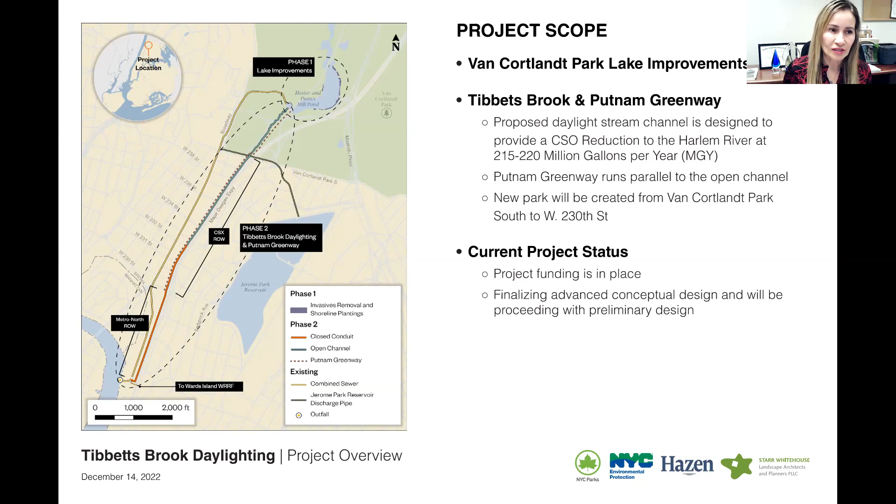Just to recap, the project funding is currently fully funded. As I mentioned, we're coming back to you to get more feedback before taking it to later design stages for the PDC meeting next summer.

These are the four areas we're going to focus on today, and we believe these are the four areas you've given us significant feedback on at this stage of the design.

Connectivity and circulation - Gail and the team will talk about that and the resulting analysis. Maintenance and access has been a key component of the project formulation. The good news is we've done a lot of meetings with our operational folks, as well as the fire department and NYPD, to get their feedback.

So what you're going to see today incorporates not just the consultant team, Parks, and DEP, but also input from those other agencies. Then we're going to talk about the stream access points for the public and the community, and end with the public art question.

We've been asked, it's great that you are doing this wonderful water project, a greenway, but where's the public art? That is really going to become alive as part of this project, which we are going to touch base and close with.

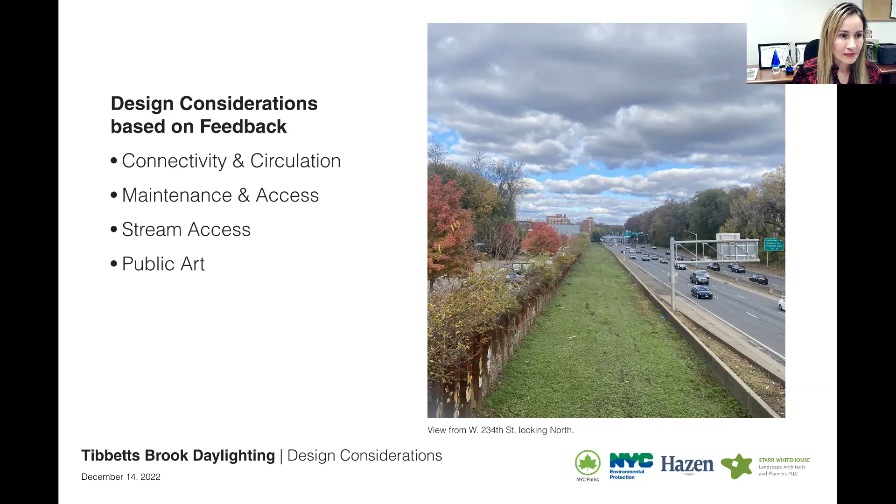So with that being said, I think the next one is Gail is going to pick it up and start talking about the context and connectivity. Gail, floor is yours. Thank you, Pinar.

So we're Stark Whitehouse Landscape Architects and Planners, and we're really excited today. Me personally, because I see some familiar faces in the crowd, and I had worked on this with you back in 1997, and in those days we thought it was a great idea, but it was kind of a pipe dream, and the plans got put on the shelves and in a few people's pockets. It's so exciting to be here to present these plans with the urgency on behalf of DEP to get the project done and in construction by 2025. So I'm just incredibly excited and honored to work on it.

As Pinar mentioned, we picked up where the TAG meeting left off last time, working with the hydrological work that Hazen had presented and early concepts. We started first really looking at connectivity to the neighborhoods, to Van Cortlandt Park, and looked at those access points, zooming out and how they connected to the bicycle network, how maintenance and access could get into the corridor, how the park circulation worked in relation to those access points. So we zoomed way out, and that's where we'll begin today, and then we'll start to dive into more details in the next phase.

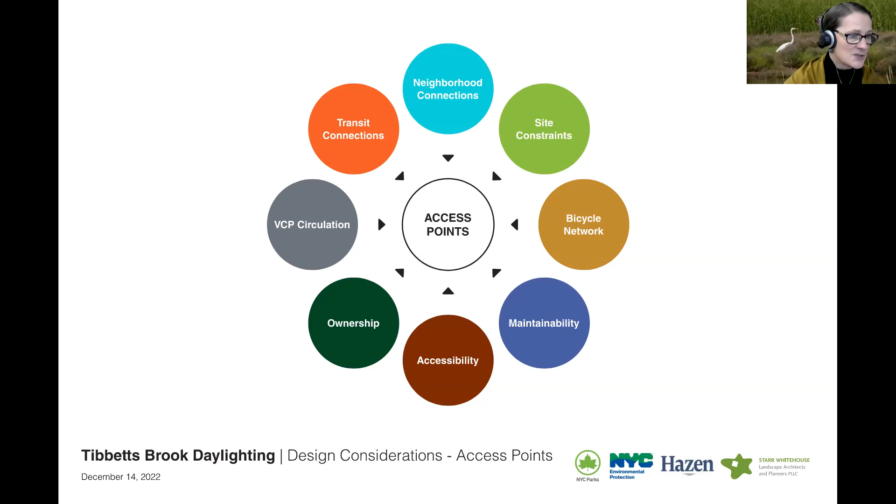One of the most important things, looking at it in a regional scale, is to understand how important this link is in the Putnam Greenway, the recently connected section in Van Cortlandt Park. It was actually recently co-opted by the state and is part of the Empire State Trail. So in theory, you can start your trip to Canada from Tibbetts Brook. So it's really a greenway of statewide significance, and I think that's very important. It also connects south to the growing network on both sides of the Harlem River. So it's very important, and will continue to be a destination in and of itself.

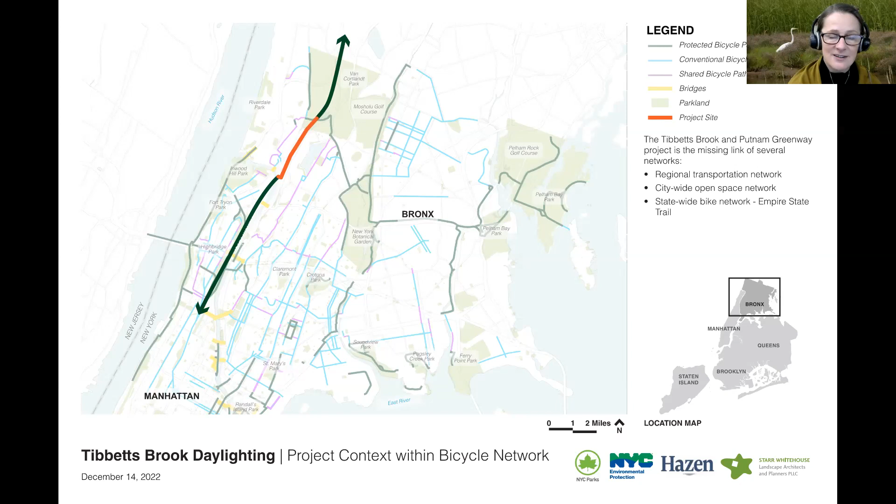So I'm just here to set the stage for my talented colleague Ankita Gupta, and she will take you through the details of the advanced schematic design. So I'm passing it off to you, Ankita.

Thank you, Gail. So I'm going to be talking about where we left off, the access points from the last meeting, which was held in spring of 2022. So where we are now is all access points are universally accessible, and we've managed to have gradual slopes from the street level to the corridor. I'm going to talk about the access points as we are now.

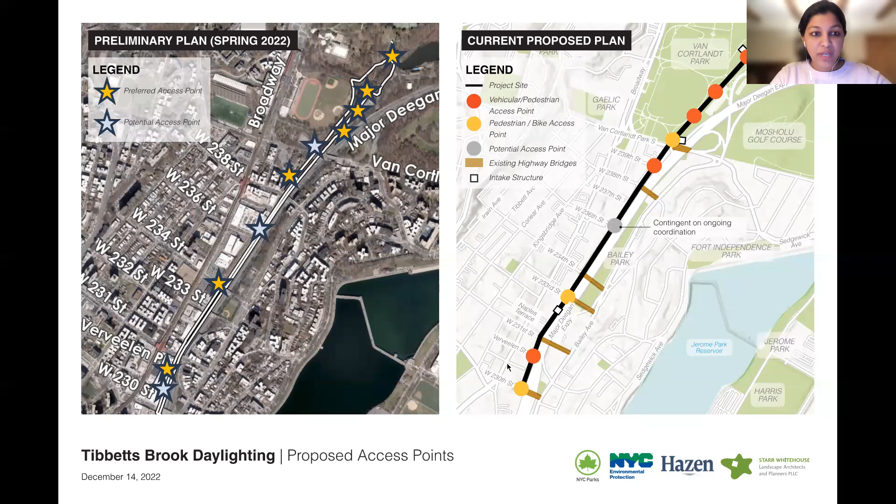Starting from Van Cortlandt Park, we did reduce one access point there, and we have 4 of them now. We have a confirmed Van Cortlandt Park South as an access point. Moving south, the West 236th Street is being considered, but it's contingent upon ongoing discussions with private property owners. We did look at 234th as an access point, but shifted it to 233rd Street due to constraints of the adjacent property being in private ownership, and to allow for a better orientation of the ramp towards the north. We also confirmed 230th Street as an access point.

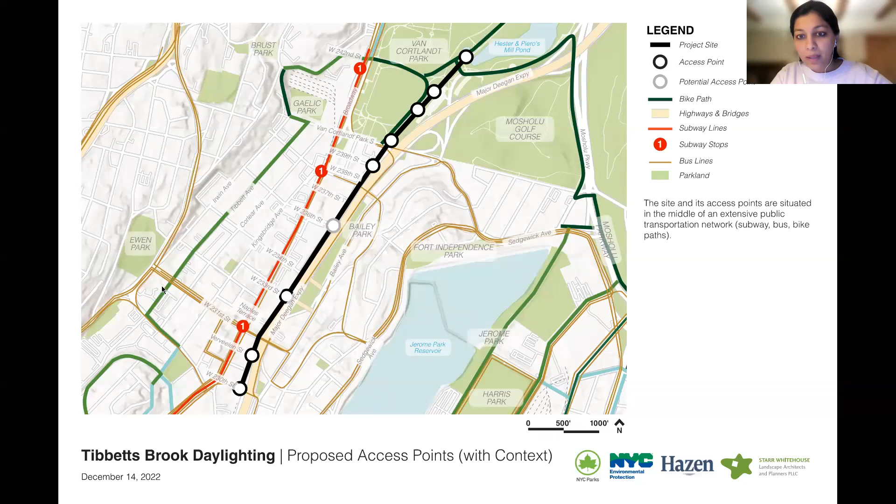Here we are showing all these access points in relationship to the analysis that was performed regarding the subway lines, the subway stops, bus lines, and bike paths.

Here we are looking at the vehicular access points for maintenance and emergency. These have been reviewed by DEP, Parks, NYPD, and FDNY. So we have 3 within Van Cortlandt Park and 2 in the CSX corridor.

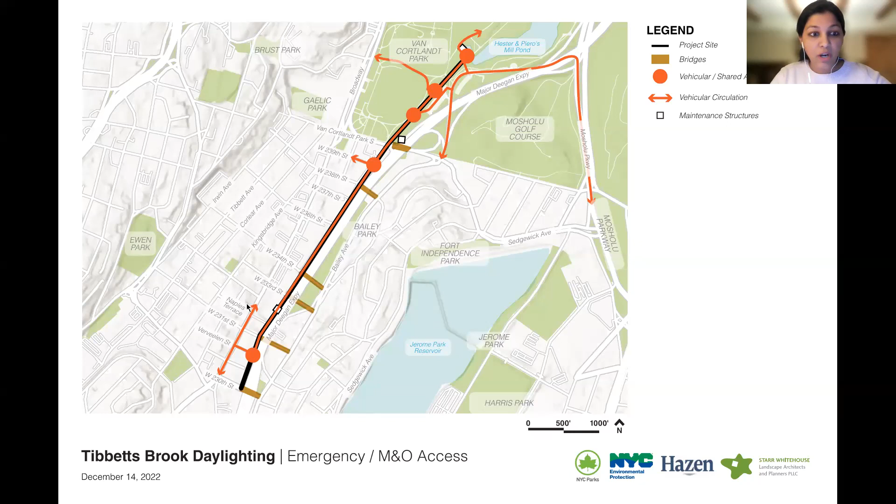Looking at the circulation within Van Cortlandt Park, this has been refined since spring. We've strengthened the east-west access by shifting the proposed bridge to better align with the existing park circulation, as well as with the strong desire line from the 242nd Street metro station into the park. And the existing parking area now serves as a trailhead with 2 access points that open onto the parking lot.

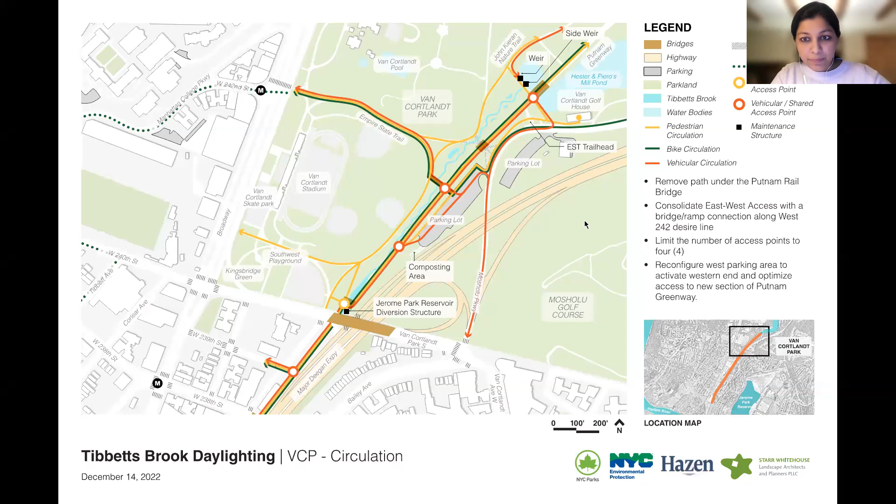So diving into the design, next please.

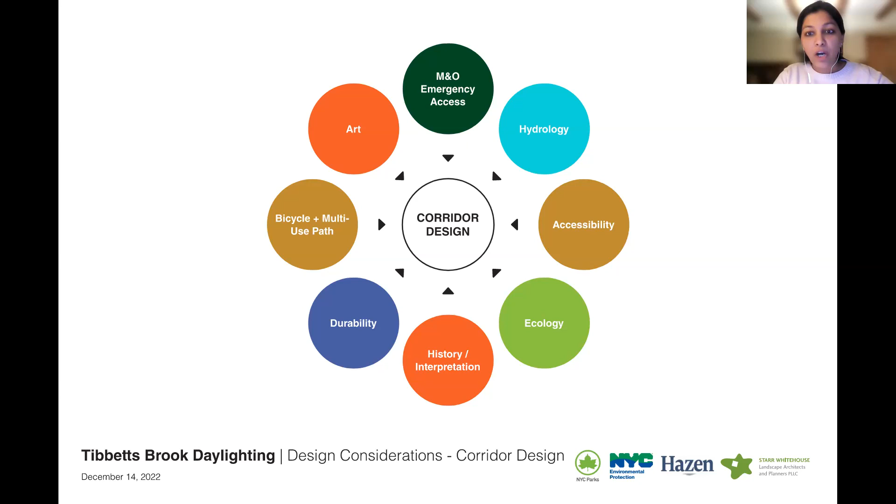In terms of design considerations, there was an ask for a more dynamic design within the corridor, and so in response, we revisited the design, and some of the things we looked at was accessibility across the park, ecology, and bike paths.

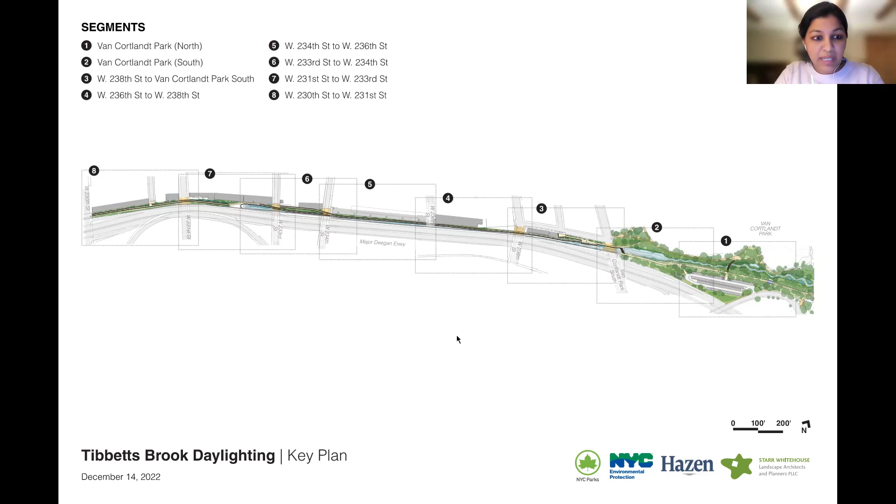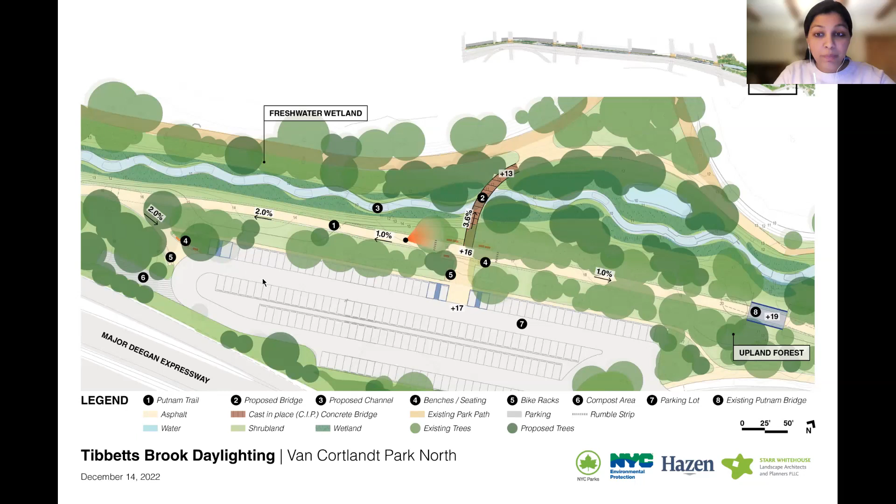As I mentioned earlier, we've shifted the location of the proposed bridge to tie in better with the east-west park circulation, as well as the West 242nd Street park entrance. We've also simplified access from the parking lot to the greenway, so now we have two trailheads that accommodate bike racks, benches, and trash receptacles, with two entrances leading you to the Putnam Trail.

Here it's a section under the existing blue Putnam Bridge. The bridge currently is a low spot and is prone to flooding after rain events. Previously we had shown a pocket wetland extending under the bridge, but now we are regrading and modifying the topography to create a dry side to the west of the bridge and a wet side to the east, ultimately capturing this water into the new daylighted channel.

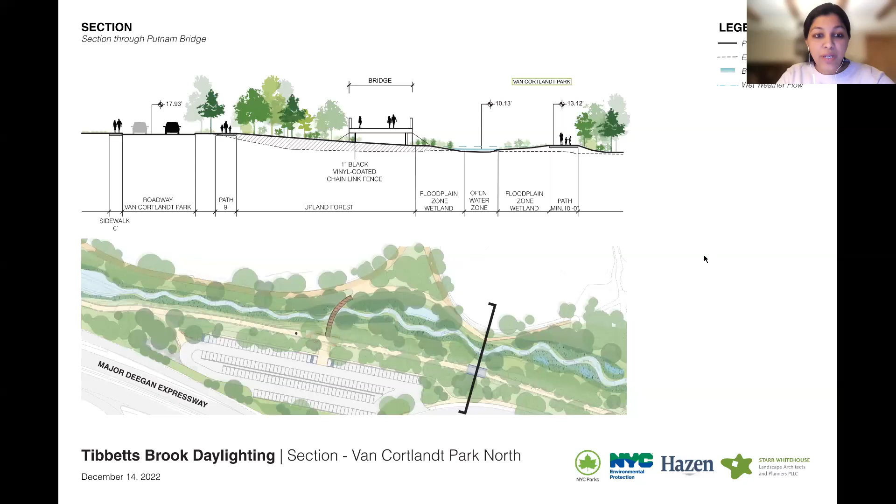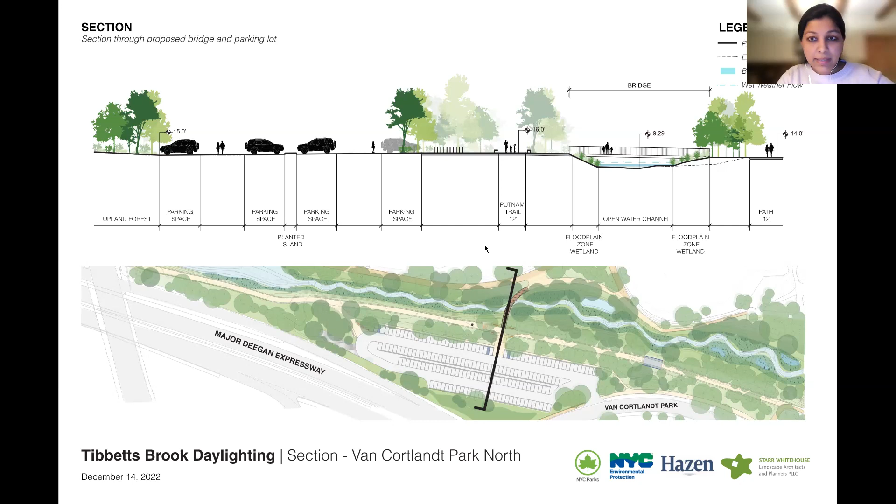This is showing the new proposed bridge spanning over the daylighted stream, making a connection to the Putnam Trail and then into the parking lot via the trailhead. Here's a view looking north towards Putnam Trail. The existing parking lot is to the east, and the proposed bridge is to the west. We were able to get a seamless connection here as the topography is fairly flat.

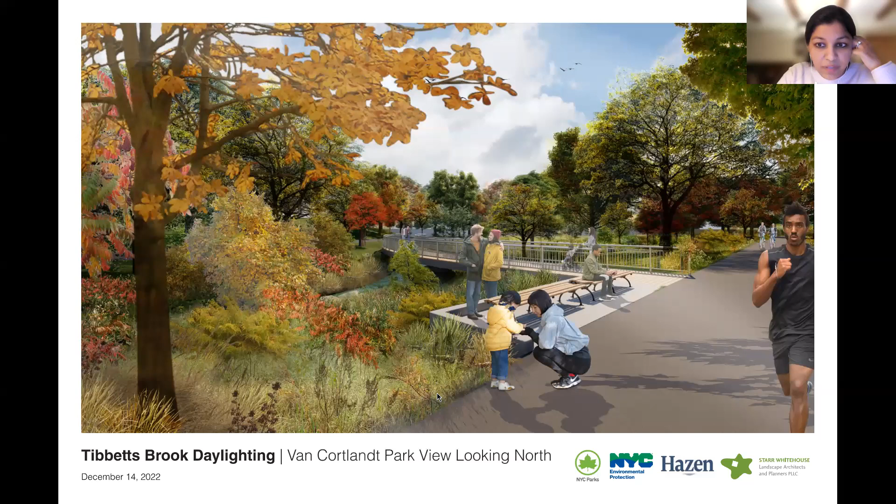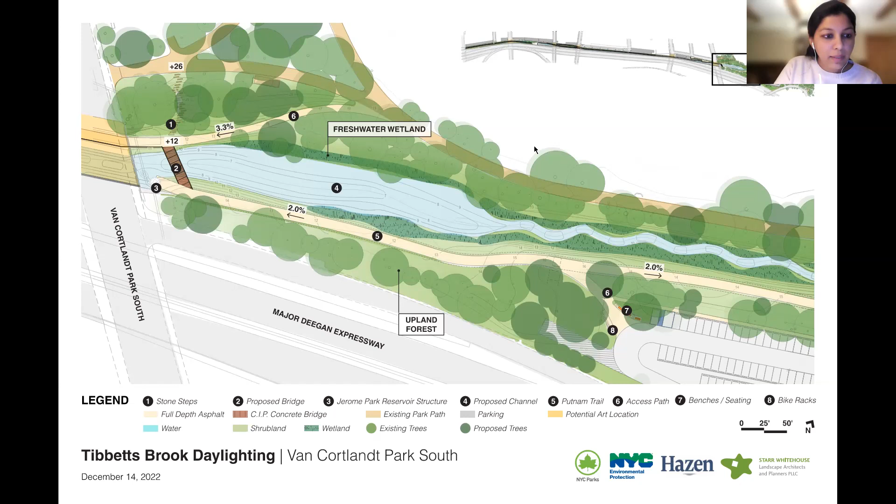This shows the relationship of the Putnam Trail to the proposed bridge and the stone steps to the east of the existing Van Cortlandt Park paths.

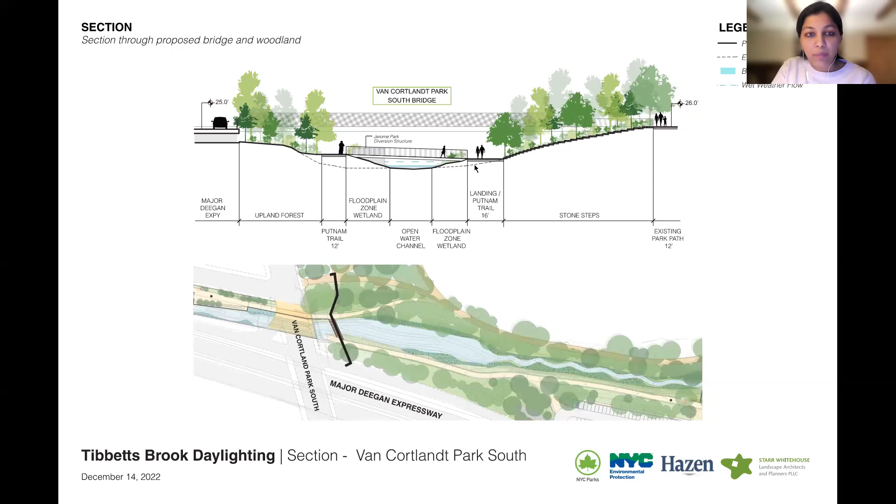Moving into the CSX corridor design, this is an image from Van Cortlandt Park South overpass looking towards the 239th Street access point. This is also the widest part of the site.

Here we have a path that was previously cantilevered, and feedback told us the general alignment was too linear. So we refined the design, and now the proposed elevated concrete pathway has more flexibility with the alignment of the path and allows for more planting areas. The path is sufficiently elevated to avoid flooding during typical rain events.

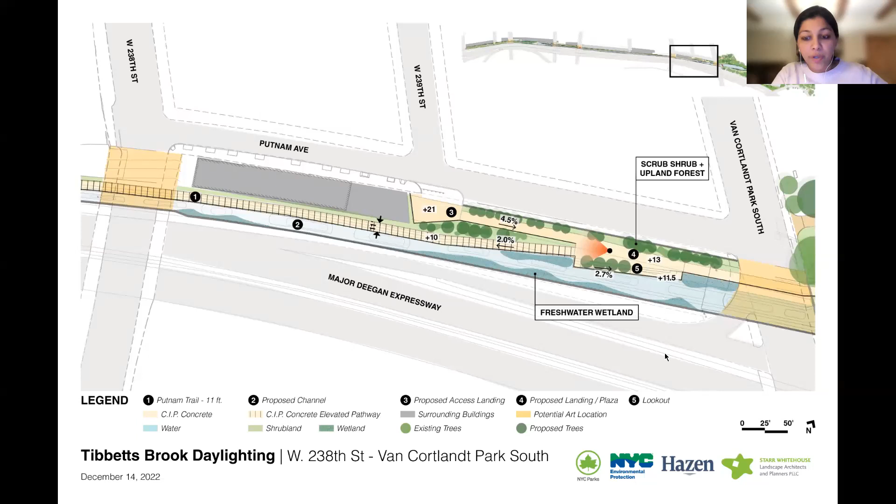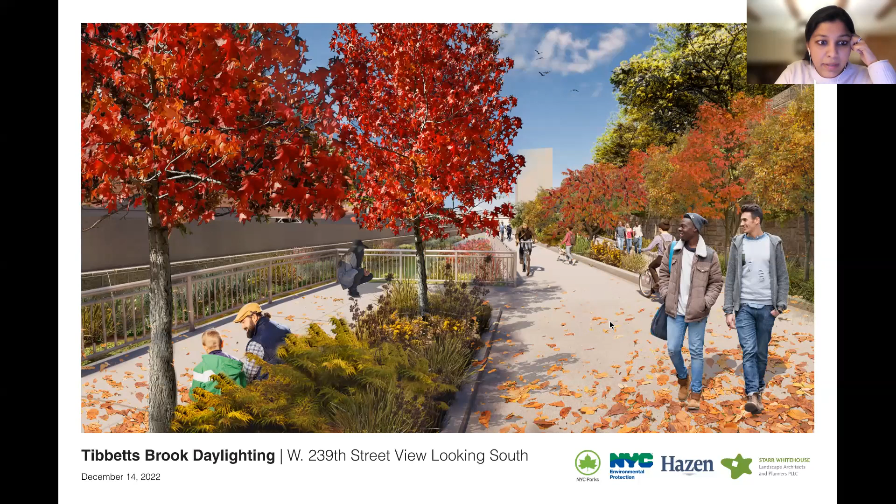Moving to the next section, between 238th Street and 236th Street, this is a fairly narrow section within the CSX corridor. We pulled the path away from the large BJ's building to create some planting buffers, and the elevated path gives us flexibility in terms of alignment. We overlapped it with the stream where possible to create a buffer from both the Major Deegan Expressway and the large building structure.

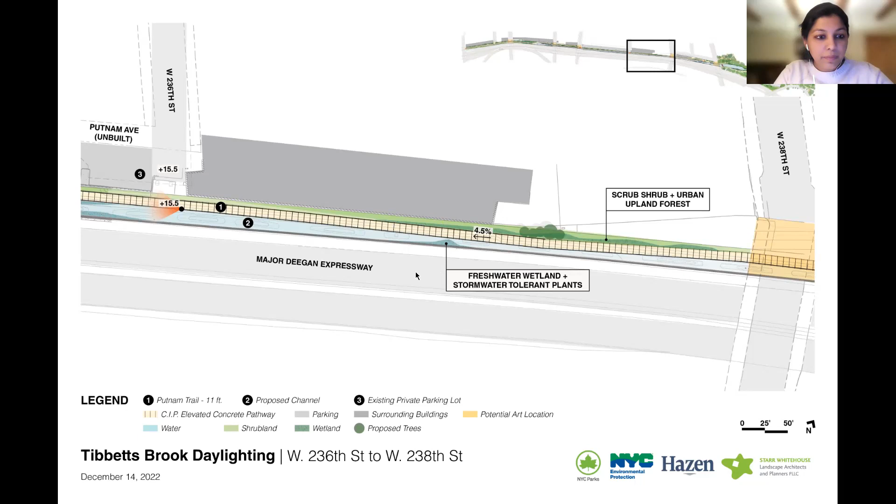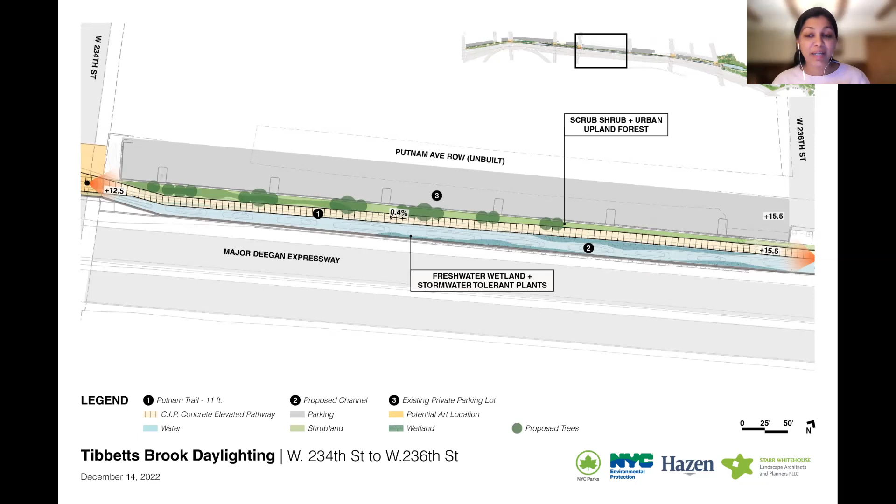Moving on between 236th and 234th, the path here is elevated at the same elevation as the adjacent private parking lot, allowing for future access if an easement can be obtained. We tried to meander the path as best we could to create variety, not just in plan, but vertically as well, as the path rises to meet the parking lot elevation and then comes back lower.

Here's a view looking south with Major Deegan to the left and the private parking lot to the right. We have also started looking at native hardy shrubs to be included within the design in conversation with the Natural Resources Group.

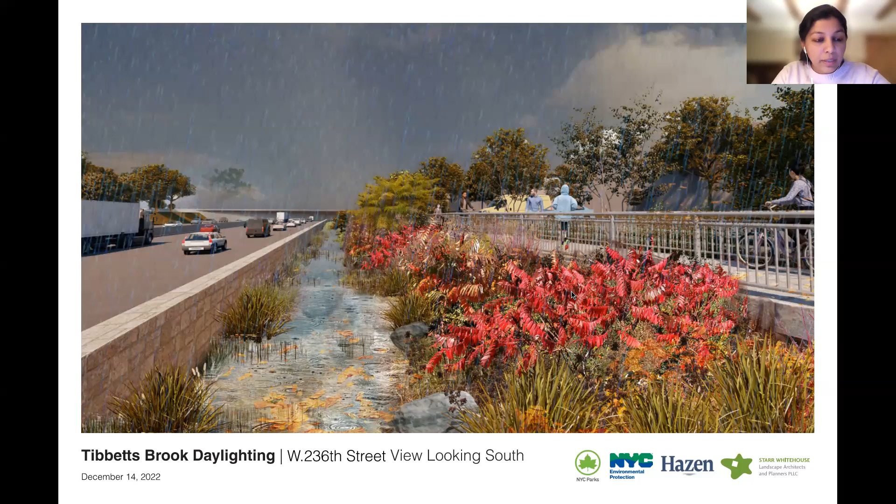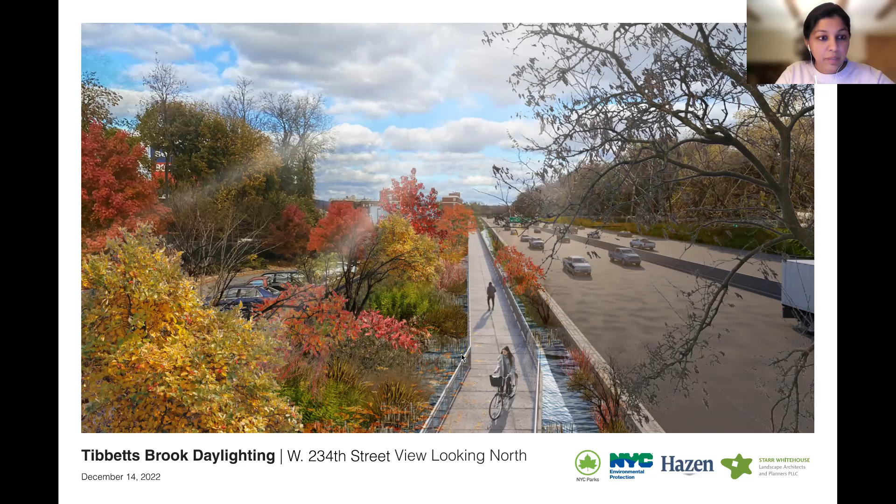Here's a view from the 234th Street overpass looking north. Again, the private parking lot is to the left, Major Deegan Expressway to the right, and then the path has a little angle to create for more variety across the corridor.

At 233rd Street, we did consider 234th versus 233rd Street. The entrance at 233rd Street did allow for a more direct connection to the greenway, and it minimizes the footprint of the ramp itself, allowing for more planted areas. It still maintains connectivity to Bailey Playground, which is to the east side of the Major Deegan.

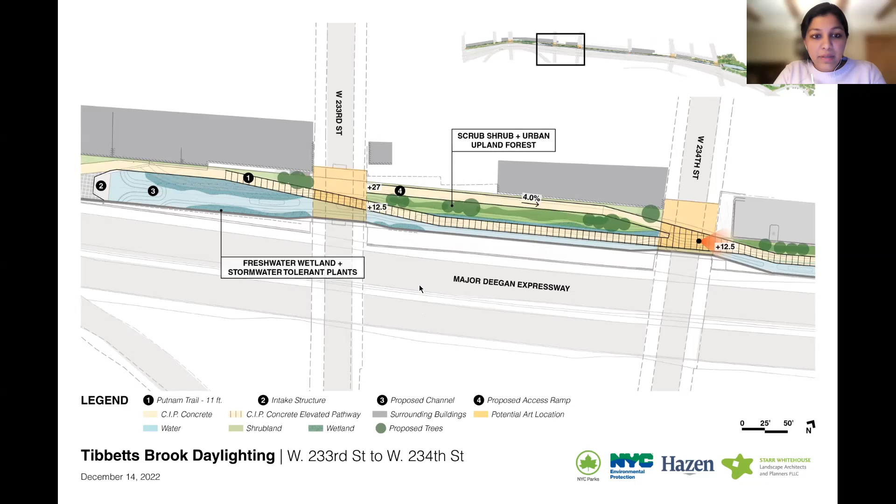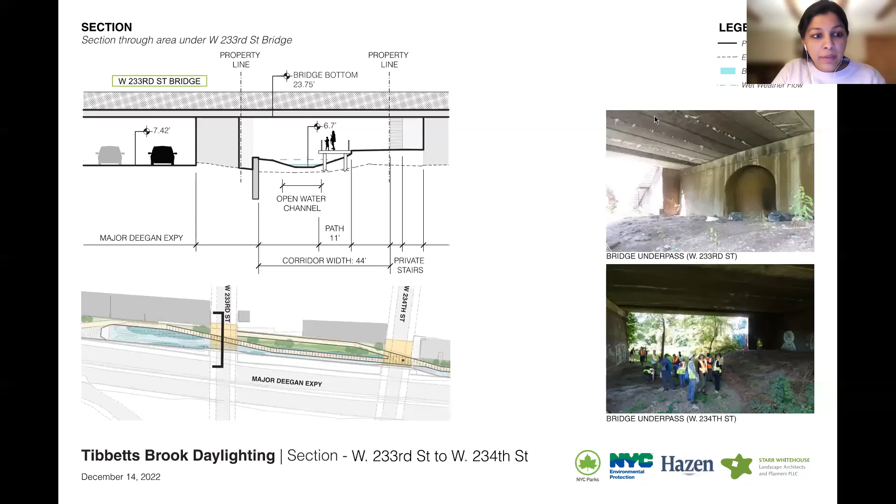This is the underpass, which offers a unique space for potential art installations.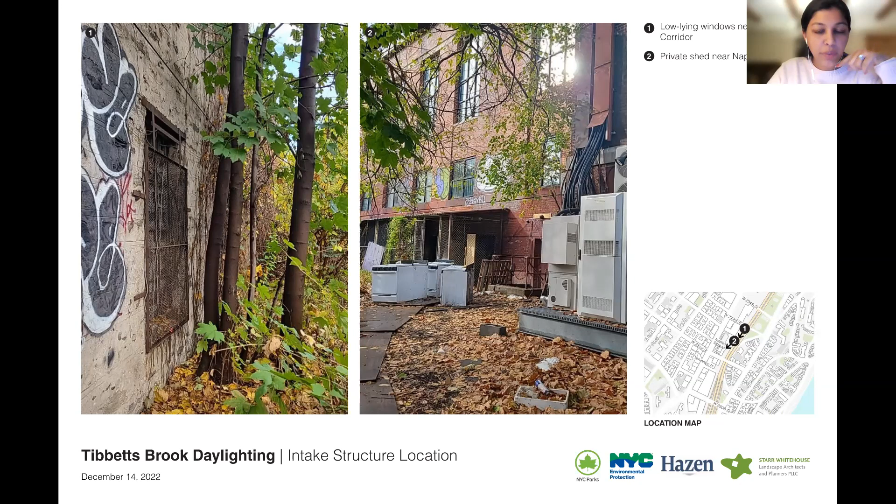As discussed in the last STAG meeting, there was a concern with these low-lying properties and how best the stormwater can be managed. So we have moved the location of the intake structure. Now it's between 233rd and 231st Street, highlighted as number 3, and shifting the intake structure has allowed for a more flexible grading adjacent to the properties, and we've included a bioretention area to capture the water from these sites.

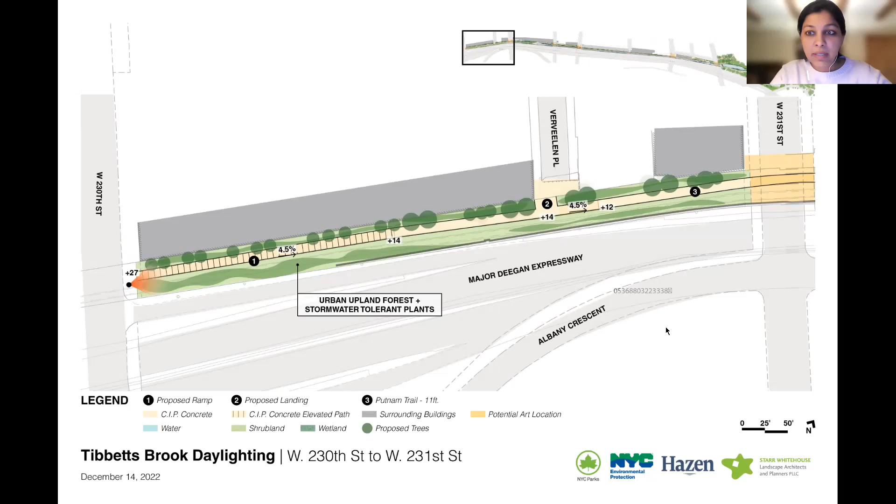We have now the new access point from 230th Street to provide for that east-west access, and then where Verveelen Place is included as a vehicular access point, which can be used for maintenance as well as for emergency purposes.

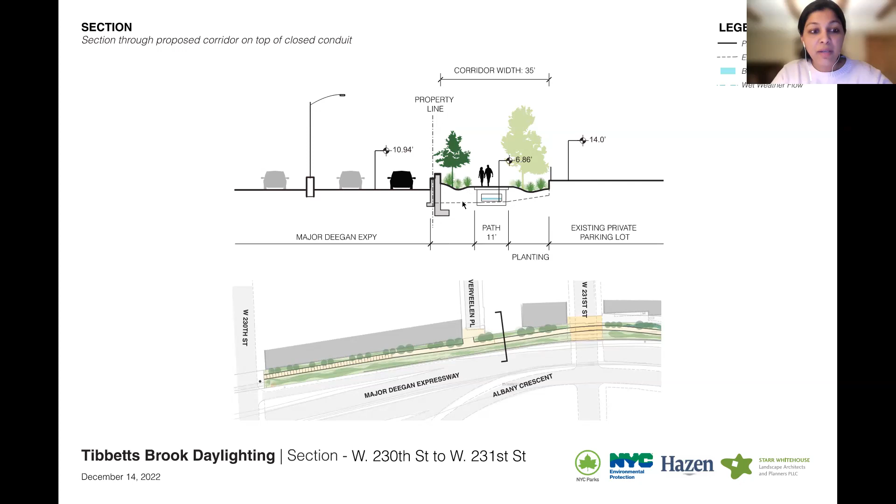Once the stream is in this underground buried pipe, we are trying to make the path and the pipe coincide. This will allow us to maximize planted buffers on either side of it.

Here we can see the buried pipe and the ramp from 230th Street adjacent to each other.

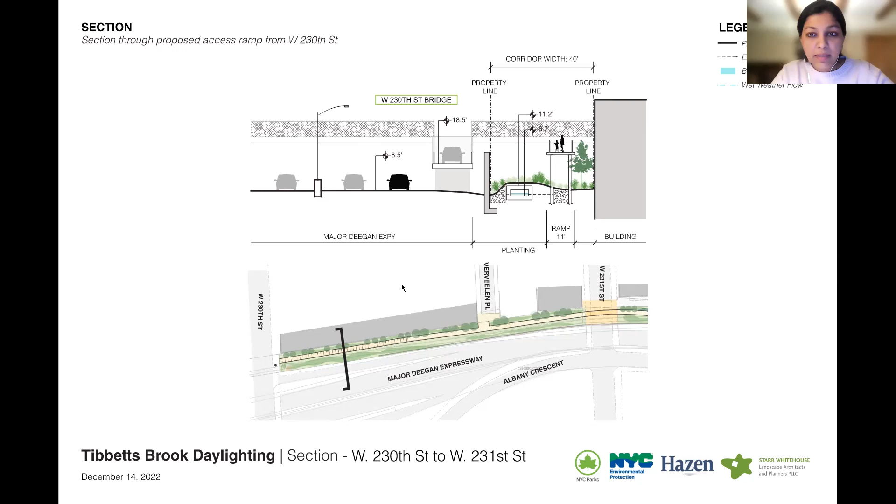This is a view from the 230th Street overpass looking north. So that's the big building structure to the left, a planted buffer, the ramp, and then Major Deegan Expressway to the right-hand side.

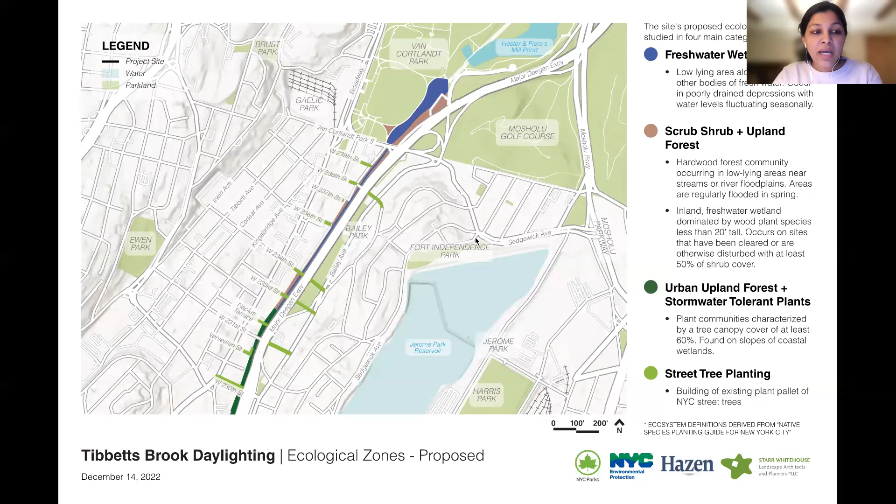Now we're going to briefly talk about ecological connections. The planting design, we've started to look at it a little bit. We want to do our best to embrace the microenvironments of both Van Cortlandt Park as well as the CSX corridor.

The palette will be such that it's extremely tough, which can tolerate periodic flooding, drought, as well as the ability to compete with invasives.

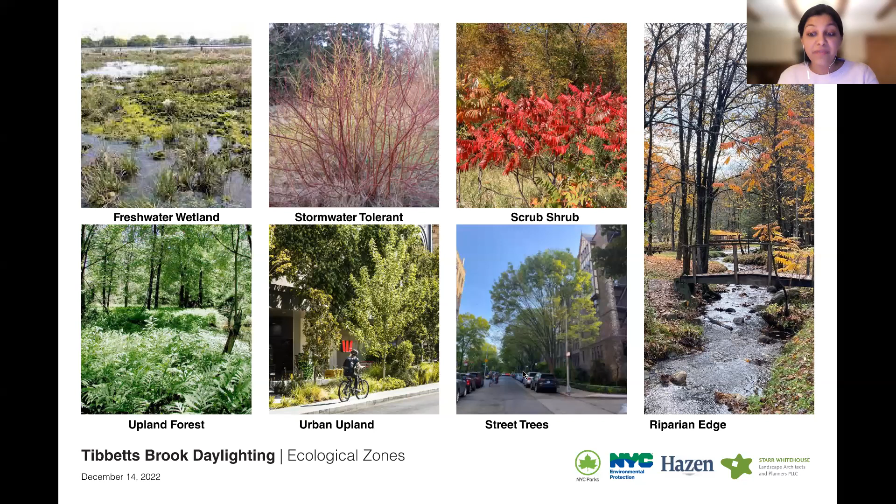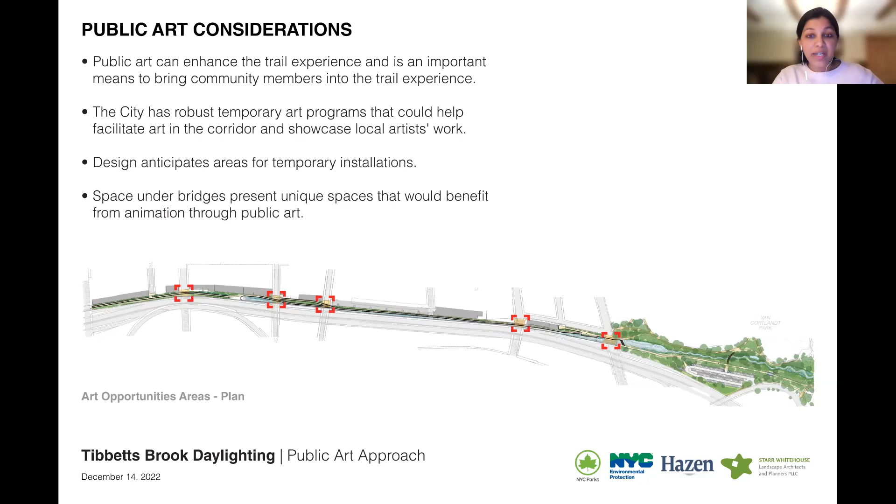And then art and interpretation. So we did evaluate spaces for art across the project. The space under the bridges presented to be unique spaces, and they can act as focal points across the site. These can be spaces to showcase work from local artists.

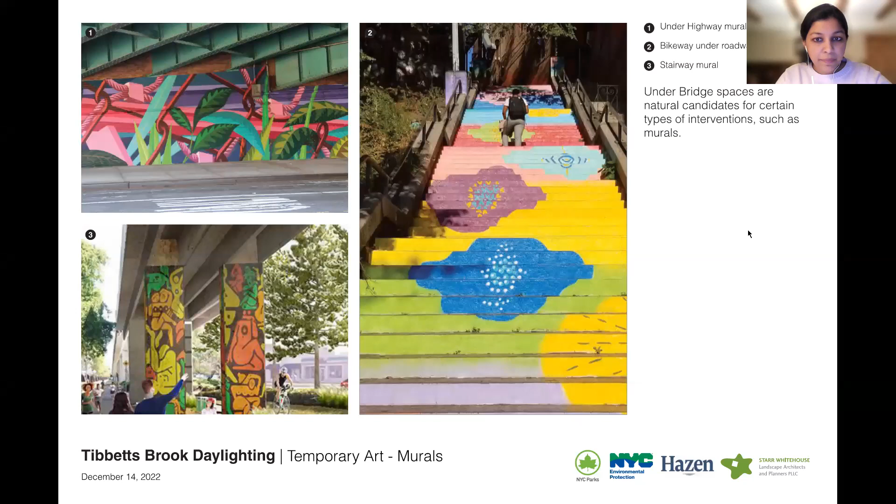So looking at temporary art murals under these underpasses. And then here there are opportunities to integrate temporary art into open spaces both on and adjacent to the greenway.

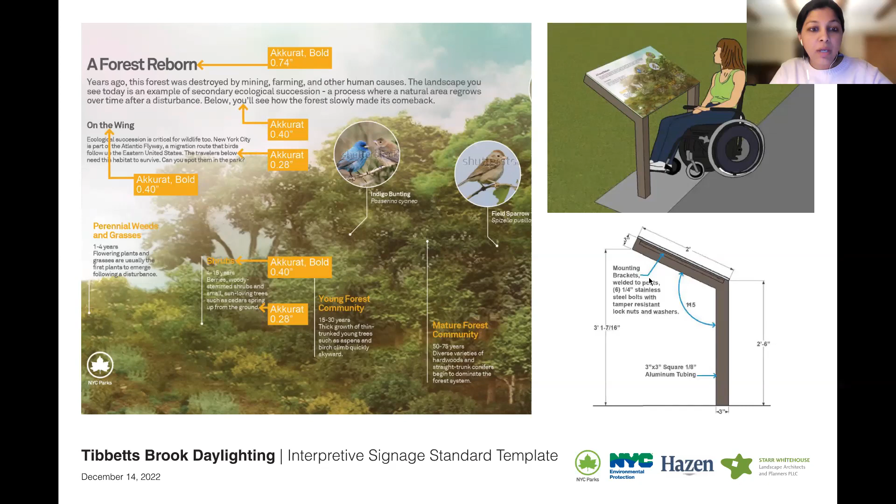We will be incorporating signage across the park. Here we're showing an example of a standard interpretive sign, which is approved by the Public Design Commission to be used across the site. And with that, I'm going to hand it over to Pinar.

All right. The next couple of minutes, I think we are going to go over a few questions that we've been hearing from you. Terry, you want to run these real quickly and then we'll talk about the next steps?

Sure. So these were kind of like the top 3 questions we've been working on. I think as we move forward, we can build upon this as we start checking things off our list, and we can put that up on the Tibbetts website as well.

So regarding the potential access point between 234th and 236th, we have been in contact with the property owner about potential access easement. The greenway is being designed so that if there is access in the future, that it can be accommodated. So we've been in discussion about that.

Has there been any follow-up with the private property owner who reached out to the community board about selling their property? We are still considering this proposal. The property is not directly adjacent to the CSX corridor, so whether or not we acquire that property, it wouldn't impact the design of the daylighting project.

Another big question that came up throughout the process this year was about public art. Something we had to consider immediately was whether DEP could include funding for that in our existing contract, and what we could do in terms of any permanent art. The answer, after multiple discussions with our procurement and contracting people, is that we were not able to make that happen on our end in terms of funding for permanent art.

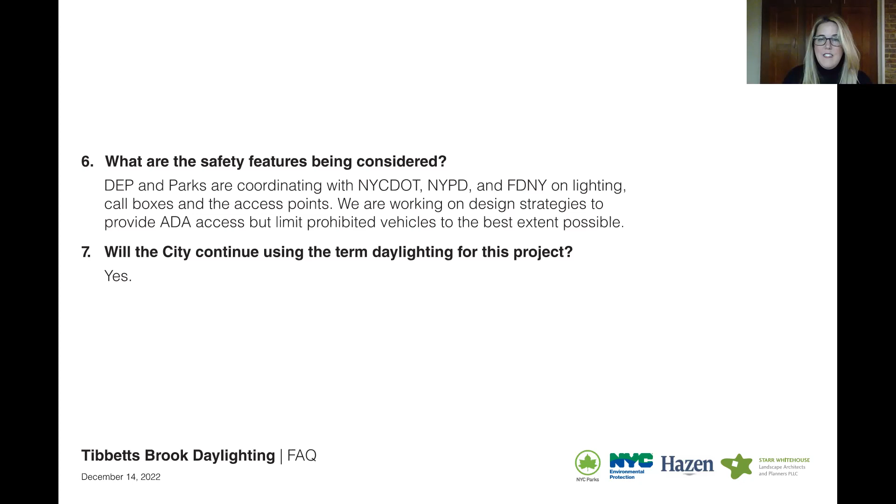So I think what we're going to do in the spring is repeat what we did this spring. We'll have maybe a field trip, another TAG meeting, go back to the community board, go back to the PDC. It's going to repeat as we progress with the design.

I also want to mention Ankita had shown a rendering of the potential interpretive signage. That's something we want your input on as well, and we'll probably be reaching out to discuss themes for that. We're not really far along in that process, and we'd love your feedback. At some point between now and the next TAG meeting, we might reach out and schedule something to get your input.

Did I miss anything, Pinar? No, I just want to add that we heard you loud and clear. We want to make sure we're on the right track to proceed and advance the design to the preliminary design phase, that's critical feedback to get. Is it a thumbs up? Are we doing good? Is it a go?

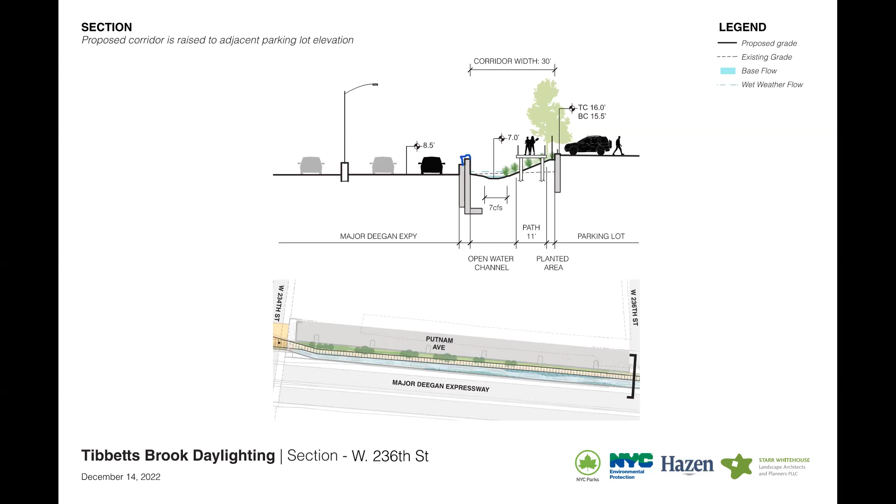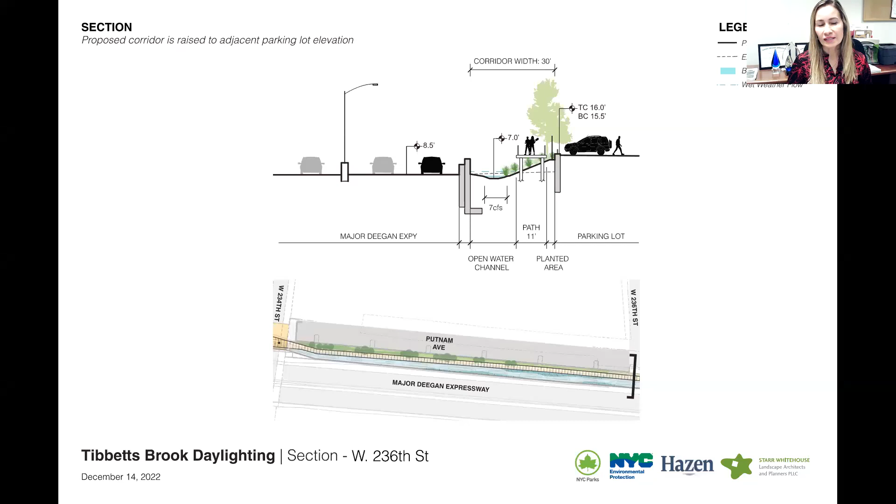Something I want to add - I think Charles brought up, are we saying the daily flow still goes to the combined sewer? The base flow, which is the 7 CFS, is going to go to this channel. We are talking about extreme flows that go above and beyond the 38 CFS, which the channel is designed for during wet weather conditions. So I just want to make sure that's clear. The answer is, on a daily basis when it's not raining, that is no longer going to the Broadway sewer. But when it rains, we have capacity in the stream to take it to 38 CFS above and beyond the baseline flow.

Okay, the next question is, what about restrooms and drinking fountains?

Did you want to take this one?

Sure. So regarding restrooms, we're talking about a tight corridor here and we cannot fit a comfort station in with everything else we're doing. That's why, as Ankita pointed out in the design, we made sure that one of our mid-length access ramps throughout the corridor connects up to the street network at 233rd, which can bring you right across to Bailey Playground, where there's an existing comfort station, as well as the comfort stations in Van Cortlandt Park. As far as water fountains, I don't know if we've gotten into that kind of detail yet. Gail, can you weigh in? Not yet, but that's something we can still look at. Certainly in Van Cortlandt Park, where those are really important trailheads, you'd have your bike rack, your bottle filler, your bench. It's kind of a kit of parts that makes sense at those important access nodes.

Another question is about whether we're looking at potential gentrification along the new Greenway. The Highline offers us a lot of insight and information that we should consider. Yes, I think the city has considered that's a possibility. I think we always want to move forward building beautiful designs across all 5 boroughs and different types of neighborhoods. I think we're in a very different type of neighborhood than the High Line, in terms of what you're going to get with tourism, footprint, and traffic there. So it is something we've considered, and as we move forward, we can talk more about where we think that might be headed.

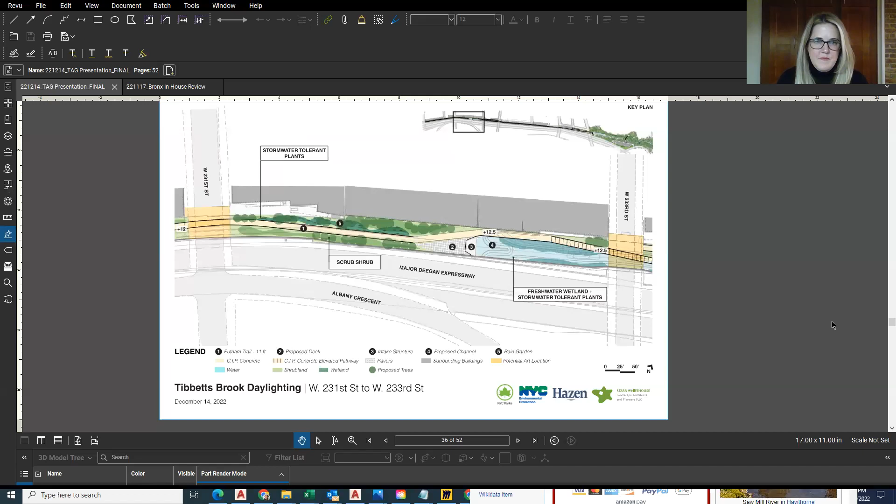You can clearly see the buildings, and from Broadway you can see them too. Can we point to that building with the parking lot? Yeah, right there - that's the building. So it's just north of that.

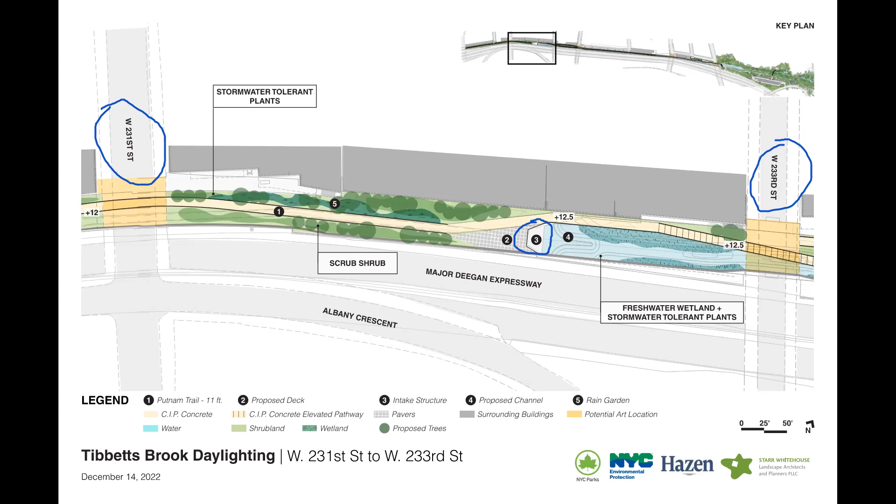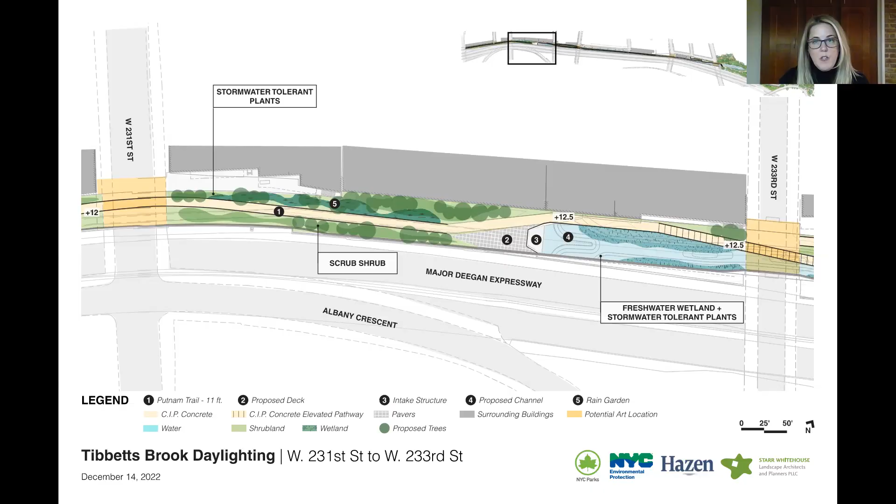Okay, I think we've gone through all the questions. Apologies if I missed anybody - you know where to find me for follow-up questions. I'll send a follow-up to this presentation with information on where to find the link, and I'll be in touch in the new year with more information. Hopefully before that, we'll be in touch about the PSA signing, and then again in the new year about possible ideas you have for signage and next steps and schedule. I hope everybody has a wonderful holiday season, and we will talk soon.

Thank you, everybody. Happy New Year. Merry Christmas, happy holidays. Bye everybody, have a great holiday and a great Christmas party. I'm sure you're going to have a great Christmas party. Beautiful, all right, bye-bye everyone.